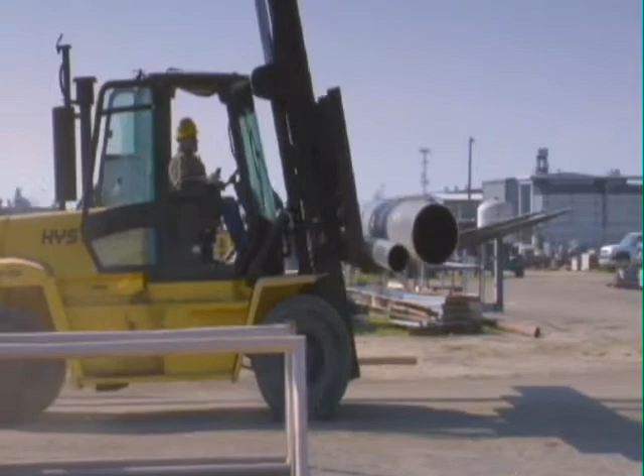This video is an overview of our safety expectations. We'll spend the next 30 minutes reviewing the critical safety issues that affect your work every day.

Let's start with the basics, your safety responsibilities. First, you must follow your company's safe work practices. Second, read the Contractor Safety Handbook provided by the producer. The handbook is your guide to safety expectations while working on our property. Keep it handy so that you can refer to it whenever you have questions.

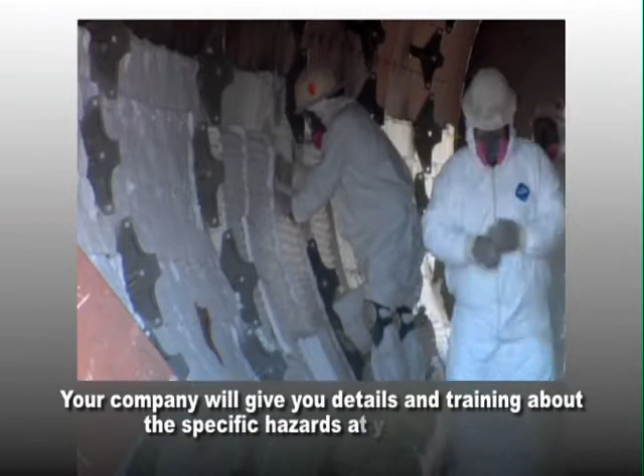We have developed this video to help you identify some of the hazards you might face on the job. Your company will give you details and training about the specific hazards at your job site. Hazard recognition and participating in safety tailgate meetings is important for you and your coworkers' safety.

Finally, some work areas will have additional requirements. Your company may have safety rules that are more strict than those of the oil producers. Check with your supervisor. You should recognize on-site safety rules cannot cover every possible situation. You still need to use your own good judgment.

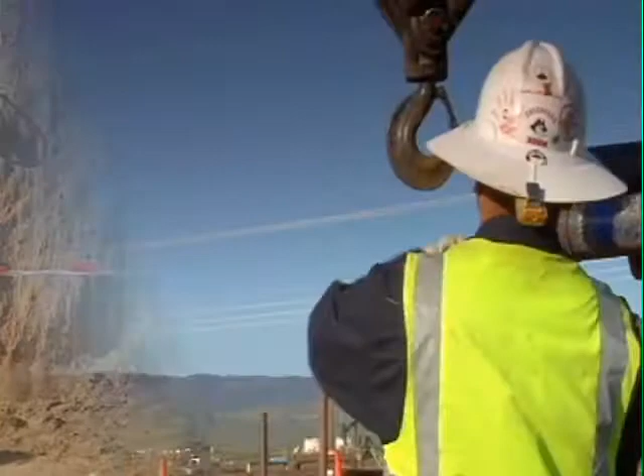As you begin your job, see that you wear proper clothing and the right personal protective equipment for your job. Stop any work that's not being done safely. You have the authority and the duty to stop unsafe work. Then correct the problem or safeguard the condition and report it to your supervisor.

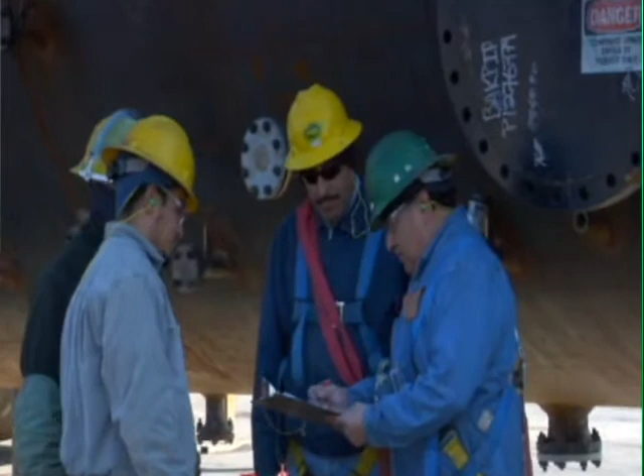All work must be planned. Your supervisor is responsible for planning work, but you must know and follow the plan. This planning includes emergencies and your responsibility to respond quickly in the event an incident or injury occurs.

Your company must provide you and your coworkers with a safety orientation and job-specific training. Your company must also provide the right tools and personal protective equipment in good working order. Supervisors must know and follow all safety policies. They must notify the producer of incidents immediately, investigate all accidents, and then submit a report to the producer.

Personal protective equipment, hydrogen sulfide, H2S, and respiratory protection.

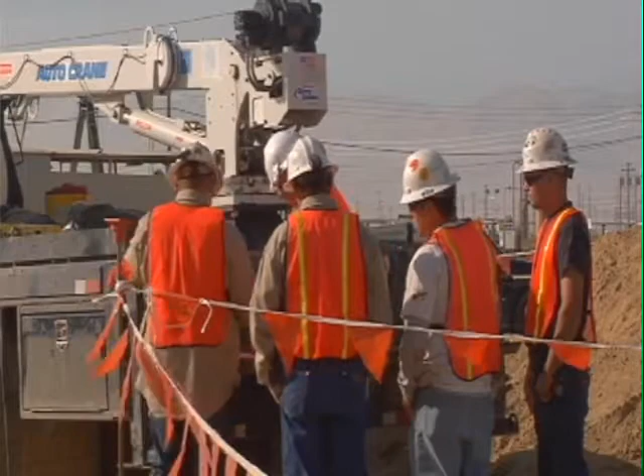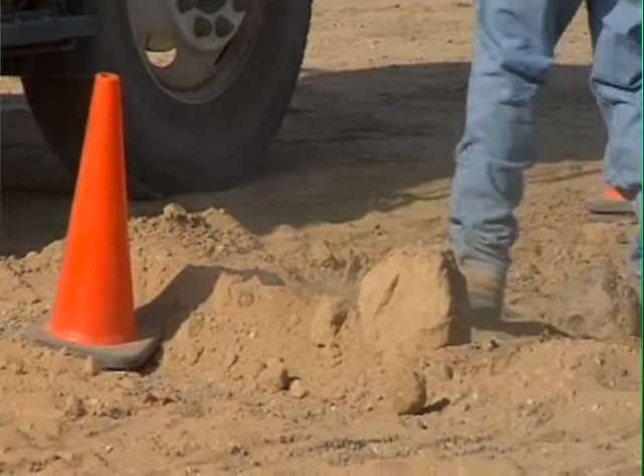Now let's discuss the importance of personal protective equipment. Everyone who works at our locations must use basic personal protective equipment. We require everyone on the job site, including visitors, to wear an approved hard hat. Most producers require hard-toed safety footwear. Many producers require that everyone wear safety glasses with side shields or acceptable wraparound safety glasses.

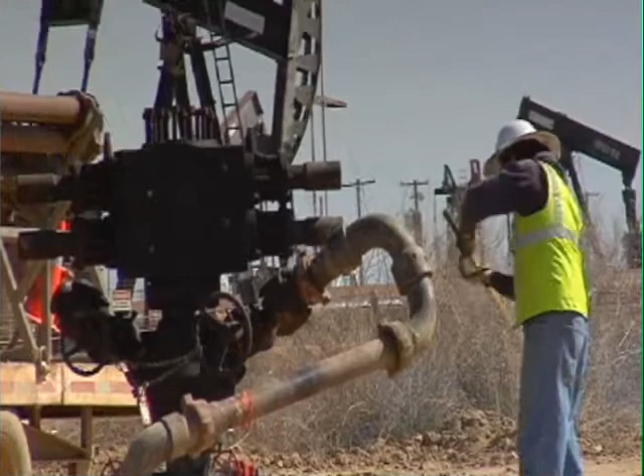Some producers require snake chaps to be worn in certain situations. Gloves must be used when the job requires it. You must wear proper work clothing, including long pants and a shirt with sleeves. Never wear loose or torn clothing or sleeveless shirts. Some producers do not allow hooded shirts or sweatshirts to be worn. Certain jobs may necessitate that fire retardant clothing, FRC, be worn.

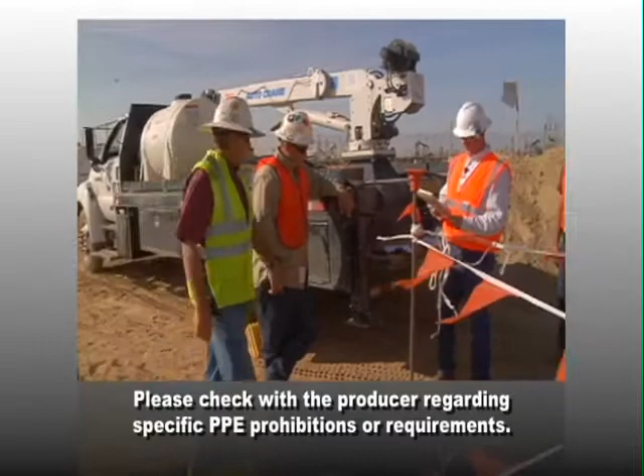If your clothes get soaked with oil or any other substance that could catch fire or irritate your skin, change the clothes as soon as possible. Some producers may have prohibitions regarding wearing rings or other jewelry while working on their properties. Please check with the producer you are working for regarding specific prohibitions or requirements.

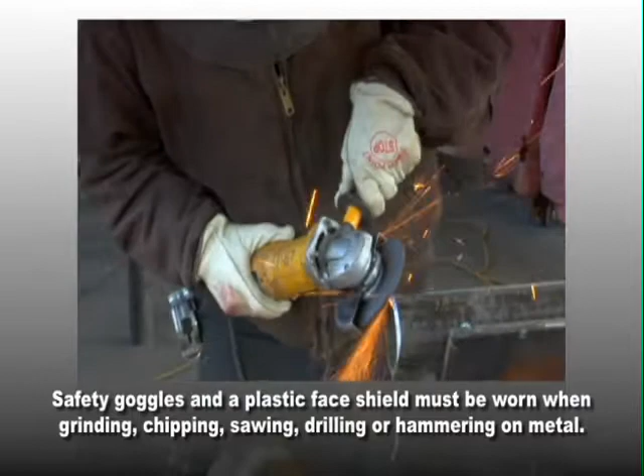Safety goggles and a plastic face shield must be worn when grinding, chipping, sawing, drilling, or hammering on metal. Chemical goggles must be worn anytime a splashing hazard exists. Approved hearing protection must be worn by all personnel working in or near posted areas, or if the job task requires it. Different jobs require specific safety equipment. For example, safety harnesses and lanyards must be worn by employees working at unprotected heights above the ground.

Many locations produce crude oil and gas containing hydrogen sulfide, H2S, or sour gas. Hydrogen sulfide is poisonous and can be lethal in low concentrations. All contract personnel working around production equipment, including well work and drilling operations that handles crude oil containing H2S, must be trained in H2S safety.

Your company is responsible for providing you with appropriate respiratory protection and required training. Many areas require the use of personal H2S monitors. You must be trained by your company in the operation of monitors.

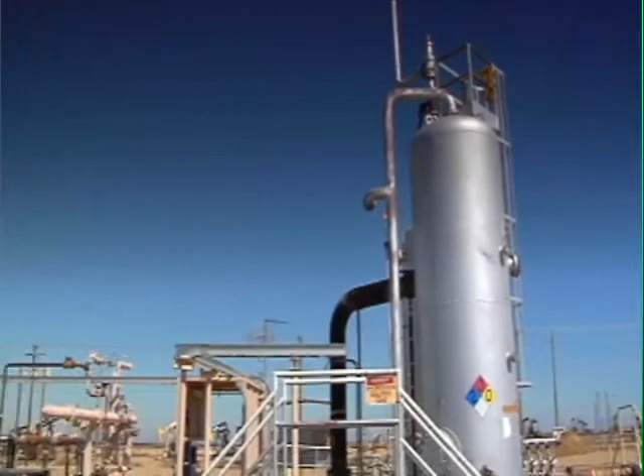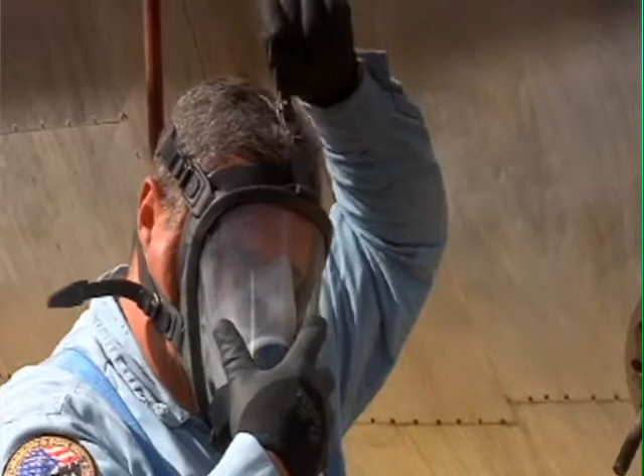If your monitor alarms, move quickly crosswind, uphill, and away from the source. When working in a possible H2S environment, stay upwind of the potential source and plan a route of escape. Wind indicators are provided around equipment handling H2S and at rig locations. Never attempt to rescue an H2S victim unless you have a backup person available and have donned SCBA.

Communication is a critical part of any safety program. Let's look at 3 important elements: the oil producer's safe work practices, the safe work permit, and energy control or lockout, tagout, blockout procedures. Safe work practices are a set of requirements that everyone must follow when working on our properties.

A key section of safe work practices are the basic work rules. Everyone must follow these rules at all times. Let's review these basic rules.

Always act with safety in mind, both your own and your coworkers. Plan each job properly. Identify and address known hazards. Do not start the work unless you can do it safely. Stop or pause any unsafe job or operation.

Do not work unless you are fit for duty. Do not work unless you are properly trained for the job. Do not take part in fighting, scuffling, horseplay, or any other activity that could injure someone.

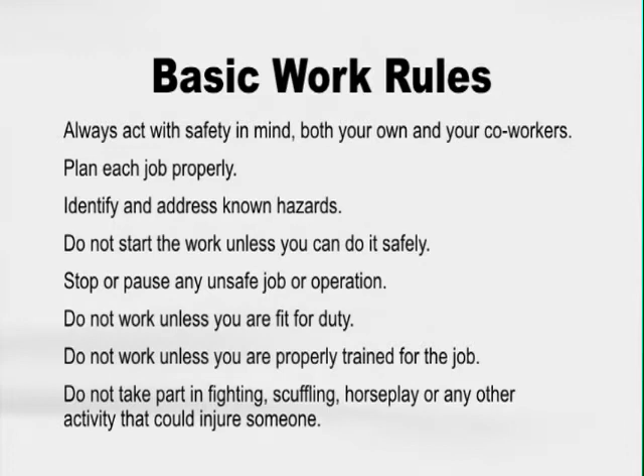Comply with all posted warning signs. Wear required protective equipment. Use and maintain tools and equipment safely. Operate vehicles safely. You must follow the substance abuse policy.

You may not possess, use, or sell illegal drugs, paraphernalia, or legal but improperly used drugs while working at our locations. This rule includes prescribed or over-the-counter drugs that are not used for the intended purpose.

Do not report or return to work when impaired by alcohol. You may not possess or use alcoholic beverages on our properties. You may not carry or use firearms, weapons, fireworks, explosives, live ammunition, or devices that will start fires.

Do not remove, damage, or interfere with any safety device or warning sign. Smoke only in designated areas.

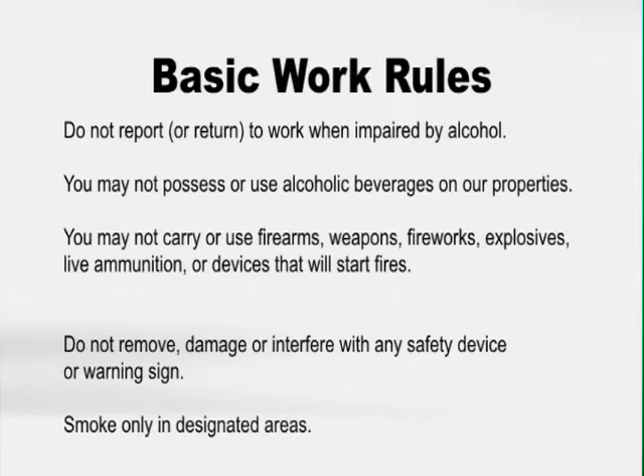Report all safety incidents to your supervisor right away. This includes personal injuries, equipment damage, and spills. Do not steal, damage, destroy, or remove any property belonging to the oil producers or its employees, contractors, or visitors.

Make sure you have a means to call for help when working in isolated areas. Housekeeping rules are an important part of safe work practices.

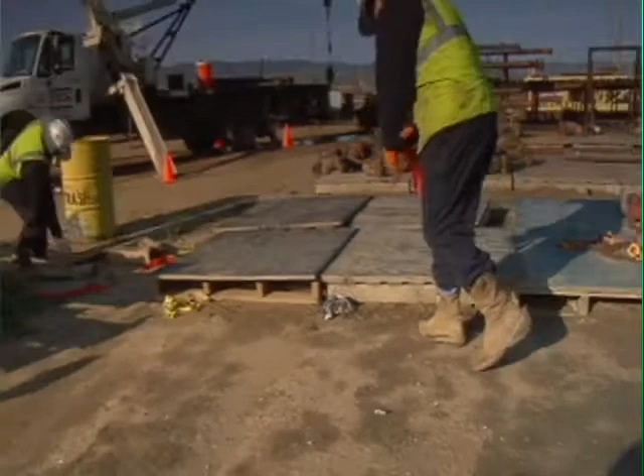Always keep your work area clean and orderly. Make sure emergency exits are clear. Clean up mud, oil, grease, and litter right away. And make sure to collect trash and debris at least once a day.

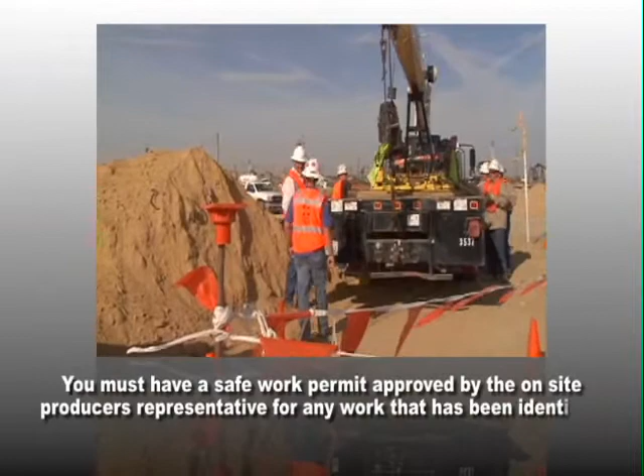You must have a safe work permit approved by the on-site producer's representative for any work that has been identified as non-routine or hazardous. Your supervisor will ask everyone involved to review the permit and then post it at the job site. Make sure you understand all the permit requirements before starting the job.

Stop work if conditions change, a new hazard occurs, or an oil producer representative asks you to stop. Now, let's review some critical hazardous exposures that can be encountered while working on the oil producer's property.

Hazardous stored energy. Energy control is required whenever you are performing tasks which involve equipment, machines, piping, or vessels which could potentially injure you due to a release of stored energy. Energy sources must be identified and isolated to a zero-energy state before service and maintenance can be performed.

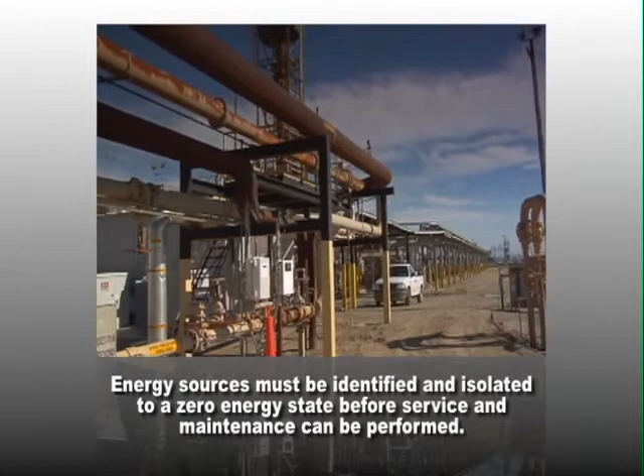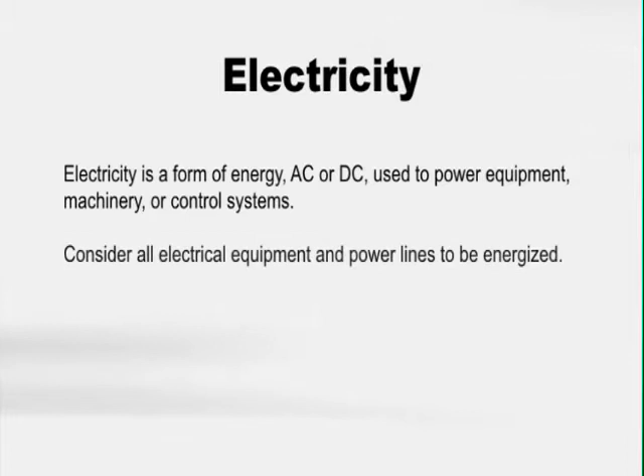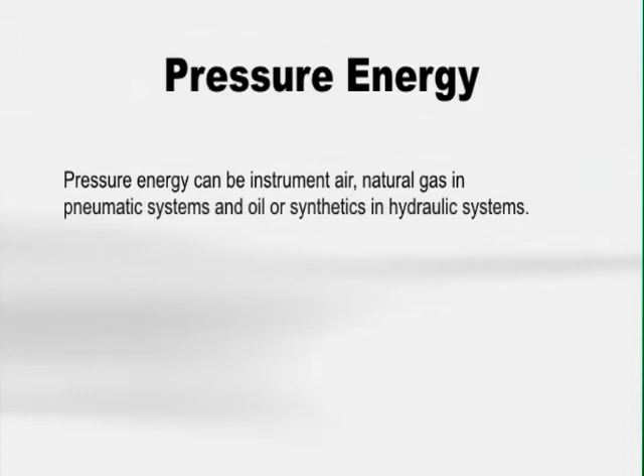Electricity is a form of energy, AC or DC, used to power equipment, machinery, or control systems. Consider all electrical equipment and power lines to be energized. Pressure energy can be instrument air, natural gas in pneumatic systems, and oil or synthetics in hydraulic systems.

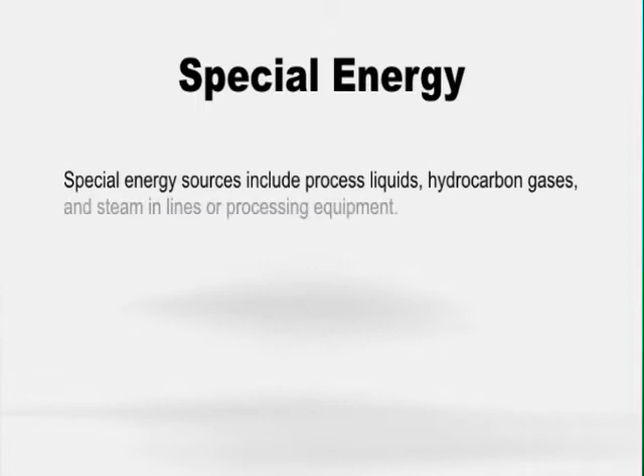Momentum gravity energy is the force in moving equipment components caused by gravity or inertia. It is critical to identify momentum energy after the power source has been shut off. Residual energy can occur after the power source has been shut off or disconnected. Special energy sources include process liquids, hydrocarbon gases, and steam in lines or processing equipment.

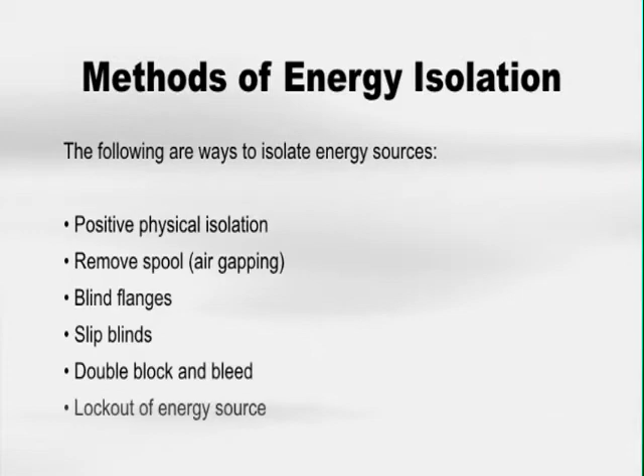Methods of energy isolation. The following are ways to isolate energy sources: positive physical isolation, remove spool, air gapping, blind flanges, slip blinds, double block and bleed, and lockout of energy source.

Locks must be used with tags to isolate energy sources. Tags should indicate the person responsible for the lockout, the reason for the lockout, the job being performed, and the date. Each producer has developed equipment lockout, tagout, blockout procedures.

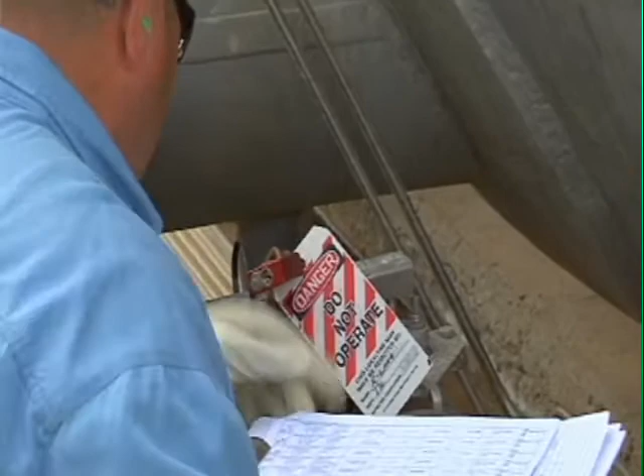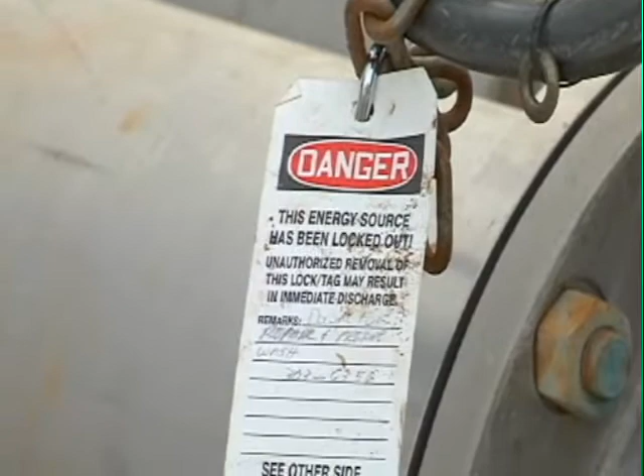Contractors must understand these requirements and assess how their own procedures will work in conjunction with the producers. Never shut down or start up equipment or open or close valves until you notify the producer's representative or have been directed to do so by the producer's representative.

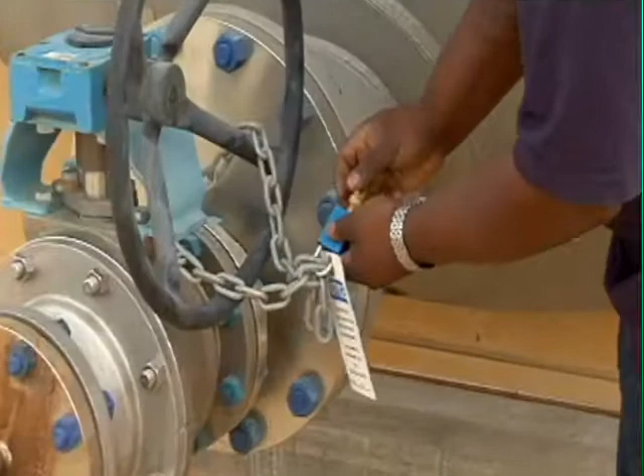Group locks can be used to isolate equipment for a group of workers. Group lockout must provide the same level of protection as utilizing individual locks. No one may attempt to start up equipment, machines, or processes that are locked and tagged out of service. Specific procedures must be followed to restart, re-energize, or activate equipment or systems that have been isolated.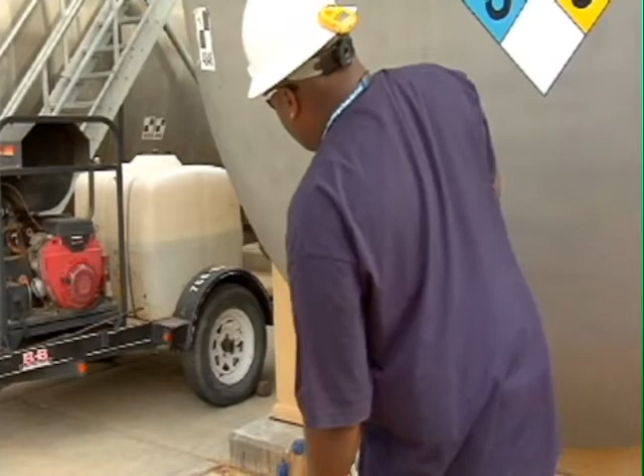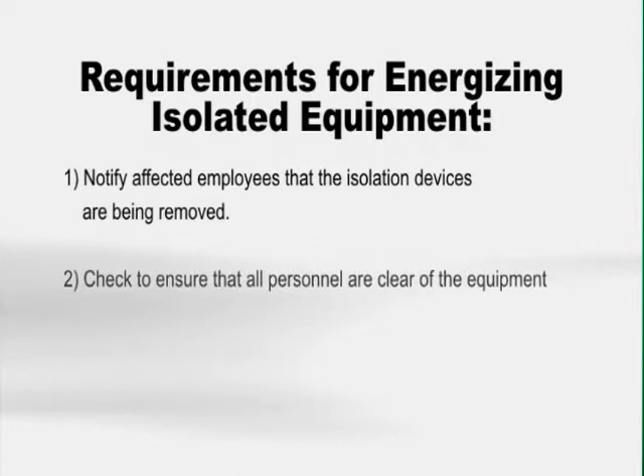The basic requirements which must be followed before isolation devices can be removed and equipment can be energized are: first, notify affected employees that the isolation devices are being removed. Second, check to ensure that all personnel are clear of the equipment or system to be re-energized. And third, locks used to isolate equipment can only be removed by the person who originally applied the lock.

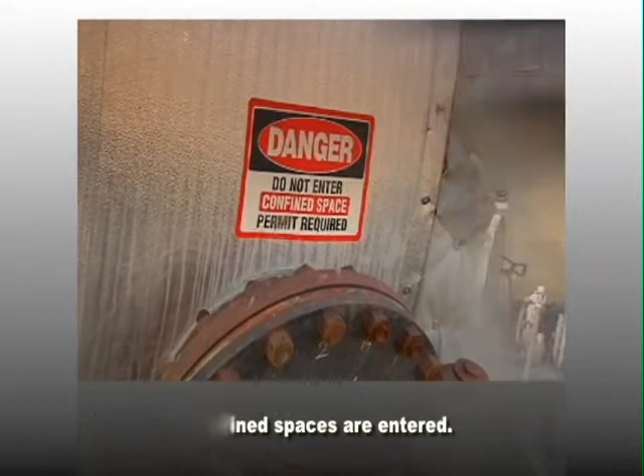Confined spaces. Confined space entry permits are required any time confined spaces are entered. Never enter a confined space unless you have received the appropriate training, have the right equipment, and have been tasked with work in that area.

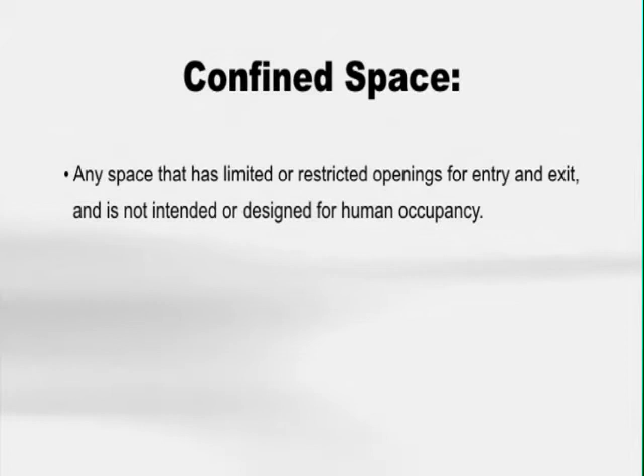A confined space is any space that has limited or restricted openings for entry and exit and is not intended or designed for human occupancy, has the potential to contain flammable, toxic, or oxygen-enriched or deficient atmospheres, or contains any other recognized serious safety or health hazard.

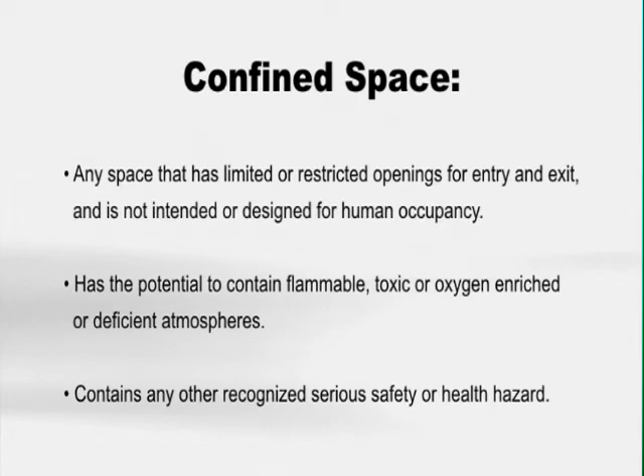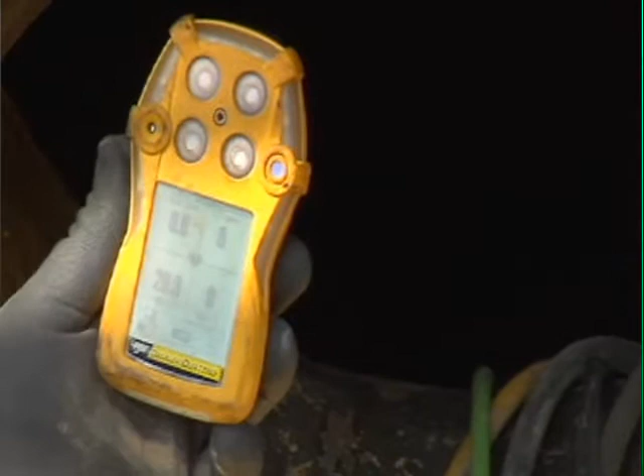A trained attendant or standby person must be assigned to a confined space entry at all times. Forced air ventilation equipment, appropriate lighting, rescue equipment, and continuous atmospheric monitoring may also be required depending on the nature of the hazard. Safe equipment operation is another important part of injury prevention.

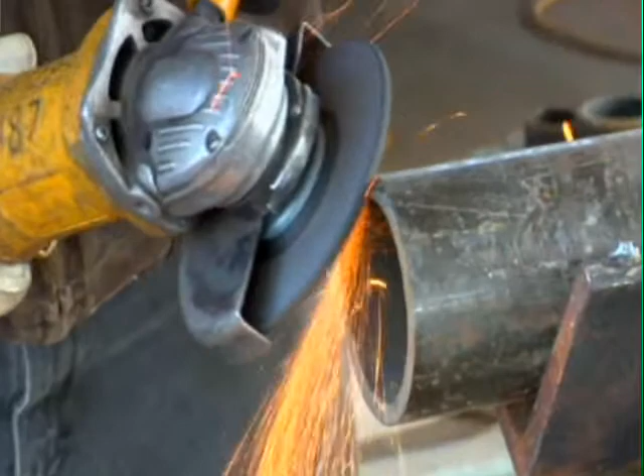Only designated and qualified people may operate power tools, equipment, or shut down equipment.

Safe vehicle driving. You must have a valid driver's license to drive on our property. Practice defensive driving. Obey posted speed limits. Drive only on the prepared roads. Wear seat belts at all times.

Use pull-through parking whenever possible to avoid unnecessary backing. If you must back up heavy equipment, have a spotter signal you. Some equipment requires backup alarms.

Some producers require that you never leave your vehicle unattended while it's running. At these locations, stop the motor, set the parking brake, and put the transmission in low gear. Chock your wheels if you think there's a possibility the vehicle might roll.

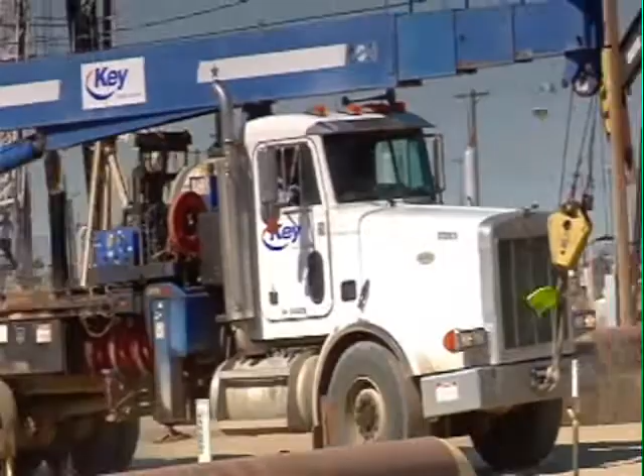Some oil producers may have special driving procedures or rules in their areas, such as specific speed limits and prohibitions regarding cell phone use while driving. Be sure to check with your supervisor at your work location for any special requirements.

Ergonomics. Always use safe lifting techniques. Improper lifting is the most common cause of back injuries. Face the load you're about to lift.

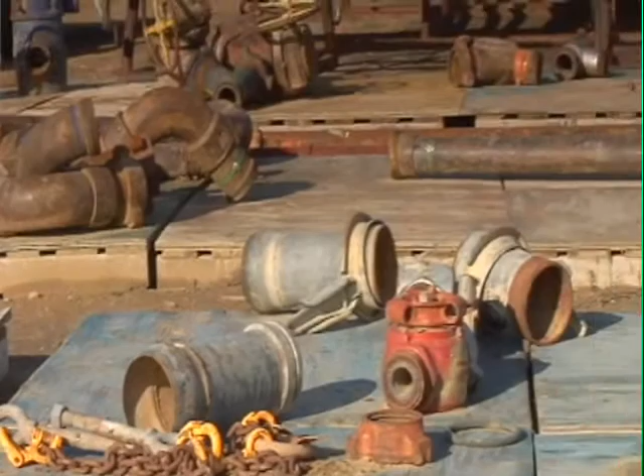Bend your knees and hold the object close to your body. Keep your back straight. Use your legs, not your back, to lift the load. You should never try to lift more than 50 pounds by yourself.

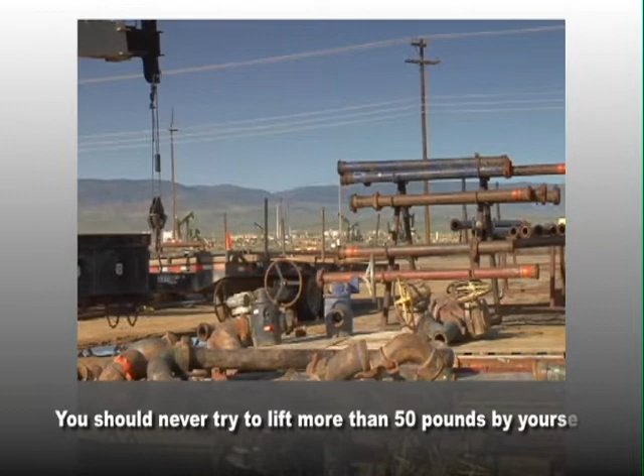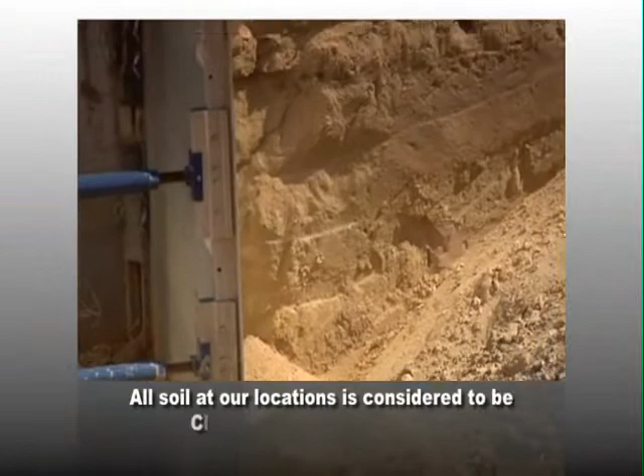Excavation and trenching. Unless otherwise determined by a competent person, all soil at our locations is considered to be Class C sandy or loose soil. A competent person is required to be on site.

For our operations, the Cal OSHA regulation for excavation or trenches deeper than 5 feet shall be followed when personnel are required to enter. Proper protective measures shall be taken, such as sloping, shielding, or shoring. Barricades are always to be installed for any open excavation or trench.

Cranes and rigging. All cranes must be operated by qualified operators. A qualified signal person must also be on duty. All power lines should be considered energized unless proper measures have been taken for de-energizing.

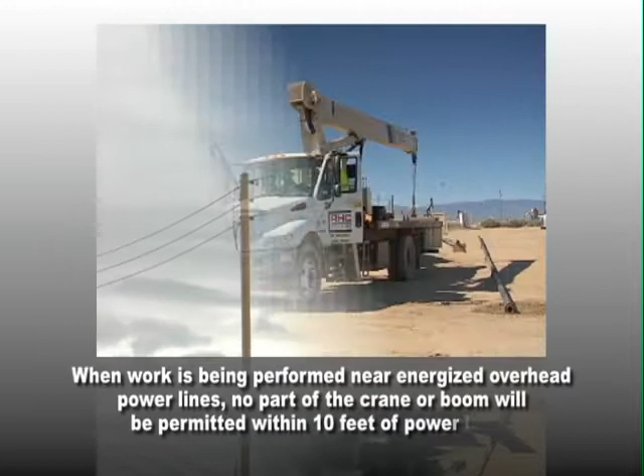When work is being performed near energized overhead power lines, no part of the crane or boom will be permitted within 10 feet of power lines. Consult with your producer representative for specific power line clearance requirements in your location.

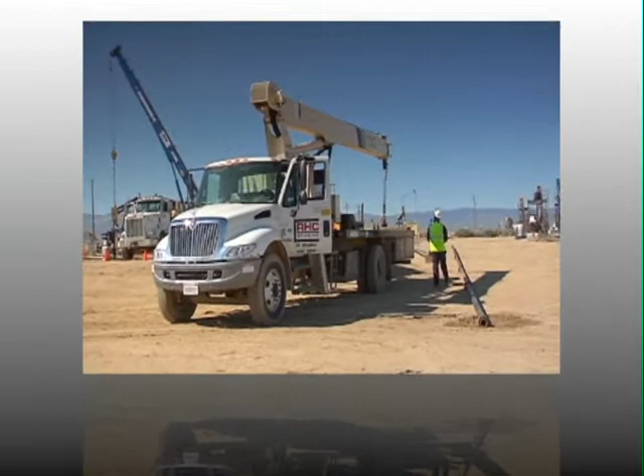Most California oil producers recommend the use of the Look Up and Live flag procedure for crane operations at their sites. This procedure is designed to keep the crane operator from overlooking or forgetting major steps in the operation of his or her crane. The crane operator shall remove the flag from the load line or lifting hook and look up for power lines while walking around the crane.

The operator then attaches the flag to the top of the steering wheel of the vehicle. If power lines are on location, they must be identified by placing cones 10 feet out below the lines.

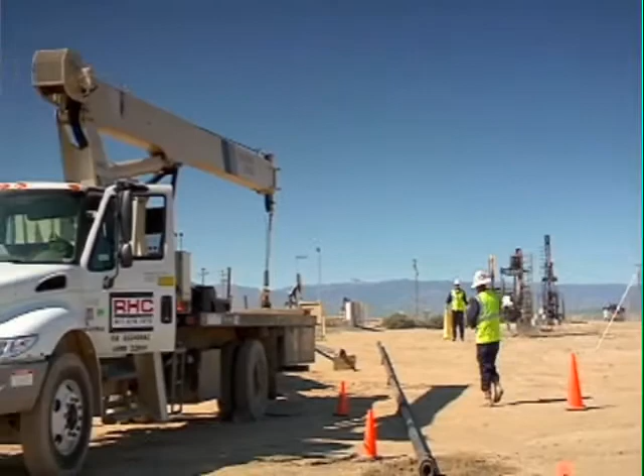When crane operations are complete, and before any driving begins, the crane operator shall remove the flag from the steering wheel and clip it to the load line.

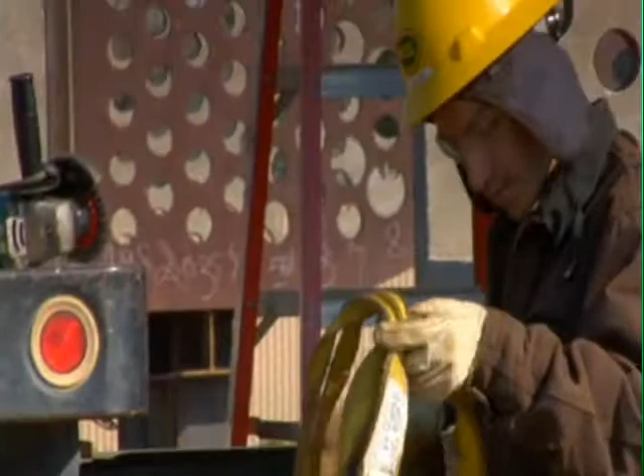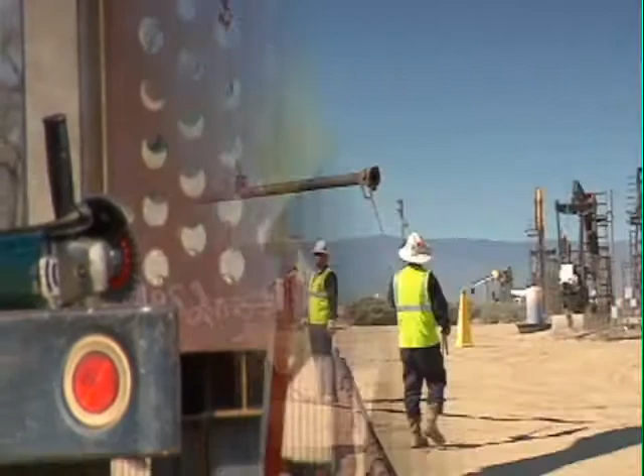Rigging methods depend largely upon the job to be done. It is important to check all phases of the job and all possibilities of job deviation which may affect the rigging components. Loads should be controlled by use of a tag line or snub line. Never walk or work under a suspended load.

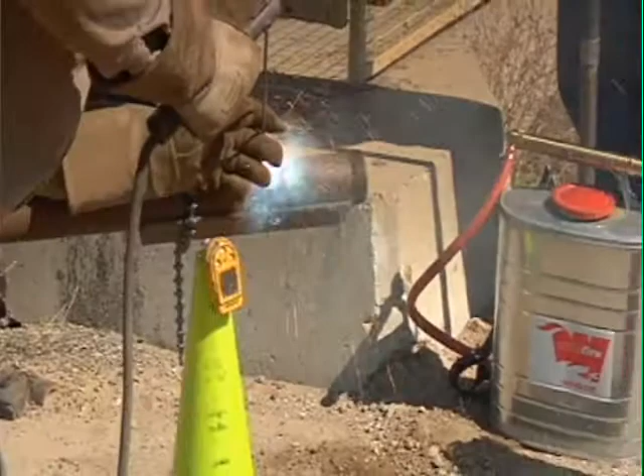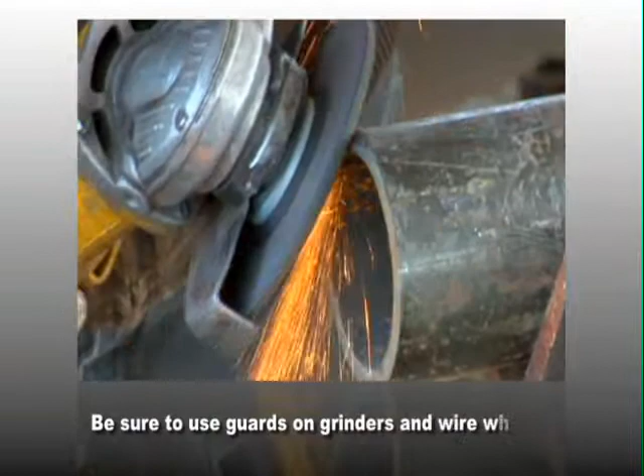Safe welding. Welding operations include a high risk of fires and injuries. Be on the lookout for conditions that could lead to a fire and take fire prevention measures. Always keep a fire extinguisher on hand. Be sure to use guards on grinders and wire wheels.

Fire prevention. Fire prevention is a serious concern in every job. Never smoke or use open lights around crude or petroleum tanks. Before welding, cutting, or grinding in a grassy area, remove any material that might burn.

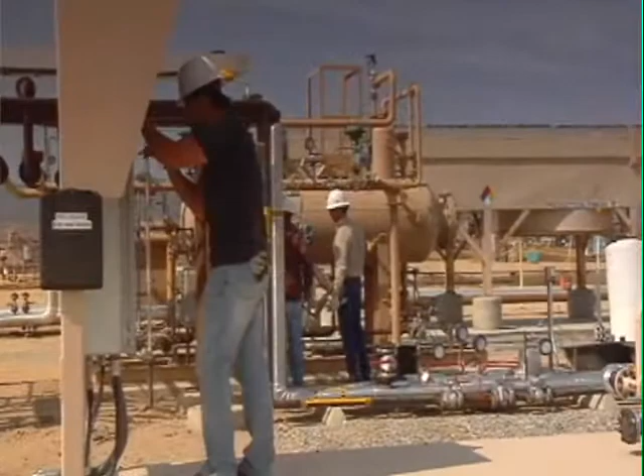Every location has its own emergency action plan. You must know your location's plan and be able to take quick action if an emergency occurs. When an emergency occurs, immediately shut down work in a safe manner and report to the designated evacuation area.

General environmental rules. Air emissions. California oil producers are committed to protecting the environment. We ask that you make every effort to help us meet this goal. We are required to maintain leak-free facilities to comply with our air permits. We ask your help to ensure that all fittings are made up tight and that all sources of gas leaks are plugged off.

Spill reporting. You are required to immediately report any spill or release of materials, including crude oil and/or condensate, to a producer representative.

Stream channel protection. Disturbance to navigable waterways, stream channels, or any other watercourse with habitat that may support endangered species in its bed or banks must be approved by the producer. Disturbance to stream channels requires permitting prior to commencing any work on the stream bed or bank.

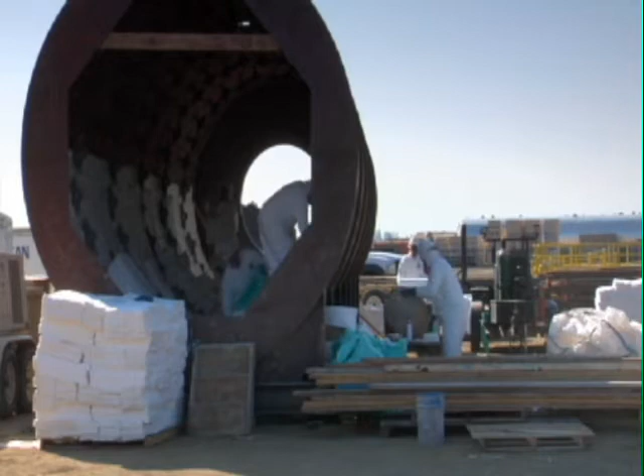Waste disposal. Any job is not complete until all waste and trash are removed from the job site and disposed of properly. The contractor is responsible for the disposal of all trash and waste generated by their activities. The disposal method must be approved by the producer. If you have any questions about hazardous waste, please contact your supervisor or oil producer representative.

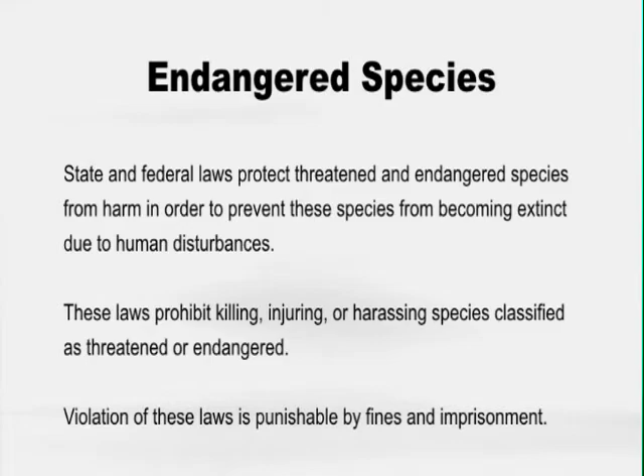Endangered species. State and federal laws protect threatened and endangered species from harm in order to prevent these species from becoming extinct due to human disturbances. These laws prohibit killing, injuring, or harassing species classified as threatened or endangered. Violation of these laws is punishable by fines and imprisonment. Endangered species are known to exist in most California oil fields. Contact an oil producer representative at your work location for a list of endangered species present at that location.

Now let's take a look at work areas where you may face certain specific hazards. Keep in mind that this video is a general overview of some of the common hazards. Your company will give you details and training about specific hazards at your job site. Your Contractor Safety Handbook includes a more complete list of hazards you may face while working at our locations. In the following segment, we will review possible hazards in major areas, including site-specific general hazards, hazards associated with wells, and hazards at and around our facilities and equipment.

Let's start with general hazards. Our fields contain a vast network of above-ground and underground lines and pipes which carry a variety of potentially hazardous fluids. You must always be aware of these lines and watch out for them while working. For example, be careful not to drive over an exposed pipeline.

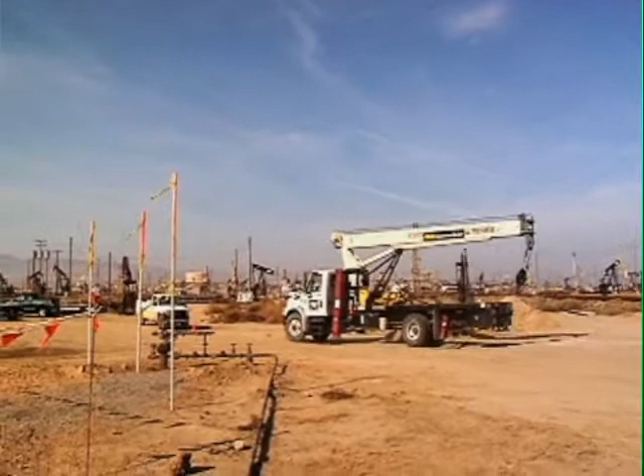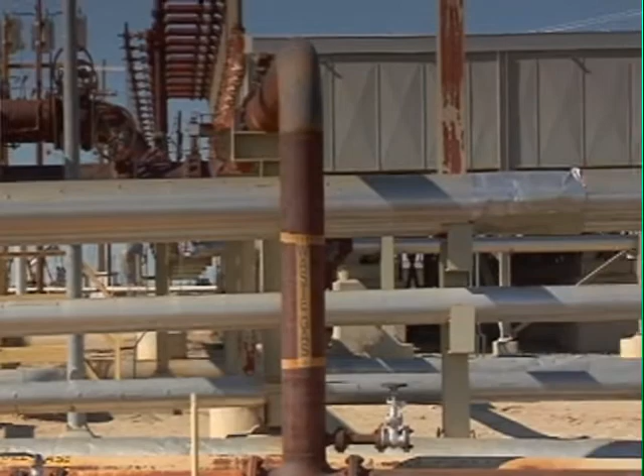Above-ground lines include hydrocarbon pipelines, steam lines, fresh and produced water lines. And remember, these lines may be very hot. You could get a severe burn by touching a line. Many hydrocarbon lines contain products that may include hydrogen sulfide, commonly called H2S. As we mentioned earlier, H2S is a poisonous gas that's heavier than air.

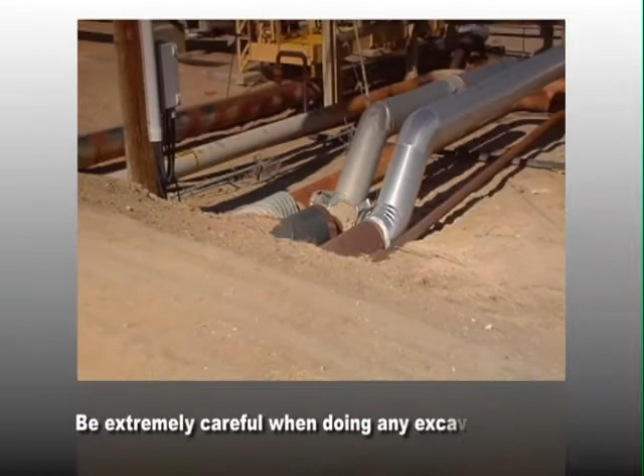Underground lines, although we cannot see them, may be more hazardous than above-ground lines. Be extremely careful when doing any excavation work. We can provide maps that show the type and location of underground lines. Always talk to your supervisor and the producer representative before digging.

Most oil fields have subsurface valve boxes. Valve boxes are low spots where H2S and other harmful vapors may accumulate, and a valve box is a confined space.

Chemicals are another general hazard you may encounter anywhere in the oil field. Many of them can be harmful. Always read the material safety data sheet before working with any chemical. Follow the precautions carefully and wear the appropriate personal protective equipment.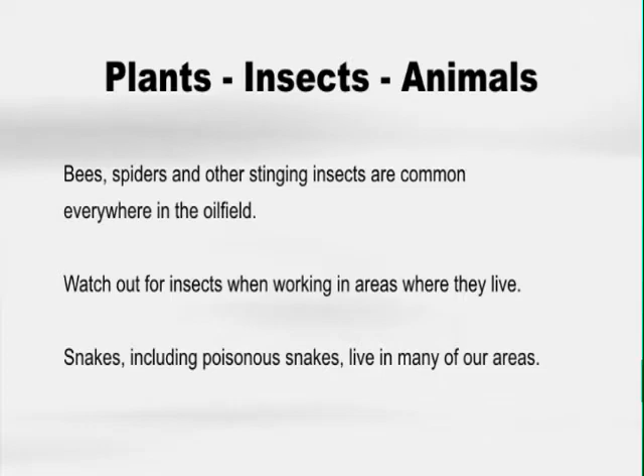Bees, spiders, and other stinging insects are common everywhere in the oil field. Watch out for insects when working in areas where they live. Snakes, including poisonous snakes, live in many of our areas. Watch where you walk and look around before reaching, especially in areas where snakes may hide.

The second group of common hazards is associated with wells. Our oil fields contain several types of wells, ranging from producing wells to injection wells. Each type has its own hazards. The most common wells are heavy oil producers used in thermally enhanced production.

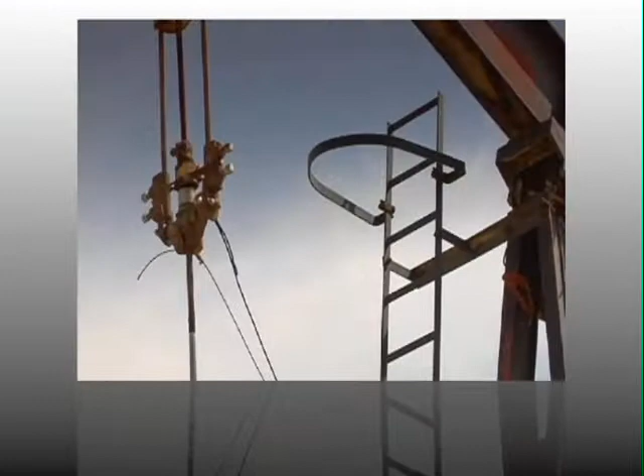Fluids from these wells may be very hot and may contain H2S and other flammable gases. Other wells produce lighter crude. These wells present a special fire hazard because the oil they produce has a lower flash point than heavy oils.

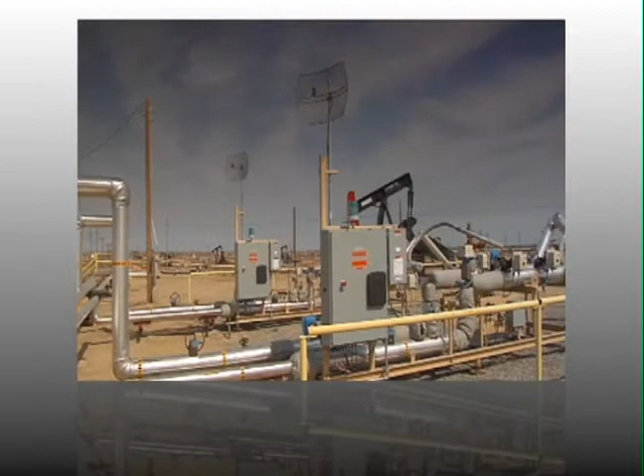Steam injection wells pose high temperature and pressure hazards. They also contain large volumes of hot steam and possibly H2S. Also, be aware of high pressure and possible high temperature hazards when working around water flood injectors.

Drilling sumps or reserve pits at drilling or workover locations have flags or fencing marking the boundaries. Be very careful when driving near active drilling or workover operations.

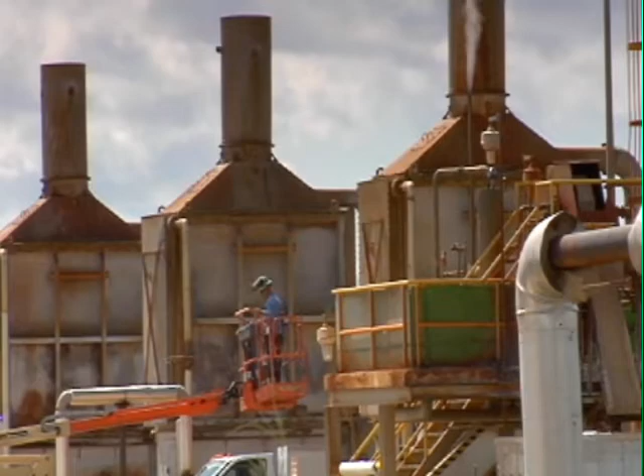Our third group of hazards occurs in and around facilities. Steam generators are essential to produce California's heavy crude, but these generators involve a number of potential hazards. Never go into a generator site unless your job specifically requires it. The most obvious hazards are the very high temperatures and pressures needed to generate steam.

High noise levels are another possible hazard. Always wear hearing protection when working around steam generators. Steam generator sites may contain hazardous chemicals, such as the caustic used in the scrubbers.

Casing vapor recovery units, or CVRs, collect the casing gases from nearby wells. CVRs are a possible source of H2S and other flammable gases.

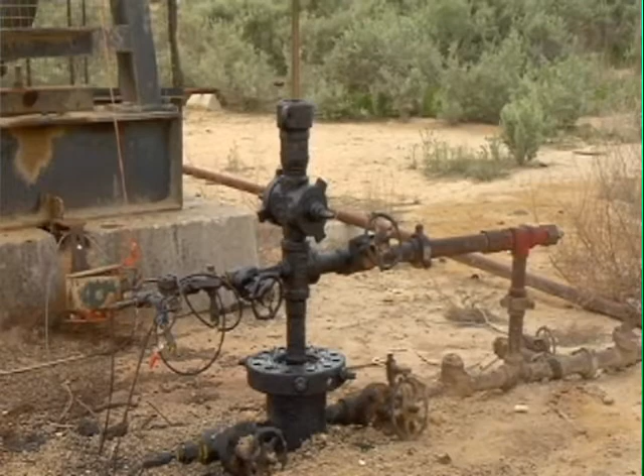Test stations are accumulation points for the flow lines from producing wells. Never operate any valve at these sites without prior specific instructions. Closing a flow line inlet valve while a pumping unit is operating can cause packing failure or line rupture.

Gas plants and cogeneration plants, like other major facilities, are often fenced. These plants are limited access areas. All workers must check in, and only those with required jobs and proper training will be allowed inside.

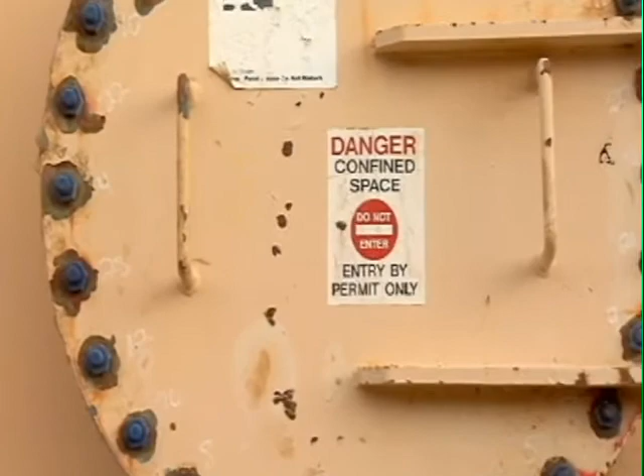Tanks are another potential hazard in our operations. Empty tanks pose a risk of fire or explosion, since they often contain oil and flammable vapors. An empty tank is a confined space when going inside. Never walk on top of a tank without obtaining the producer's approval and taking necessary precautions.

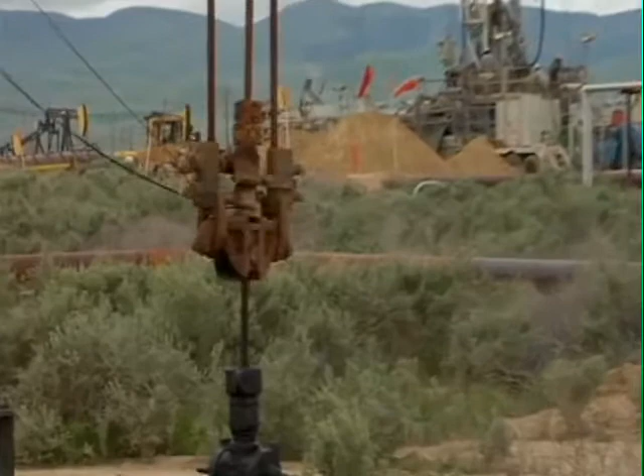Radiation is a possible hazard in some areas. We sometimes use radioactive materials for drilling, well servicing, and X-raying pipe. Be alert for radiation warning signs and don't go inside a posted area.

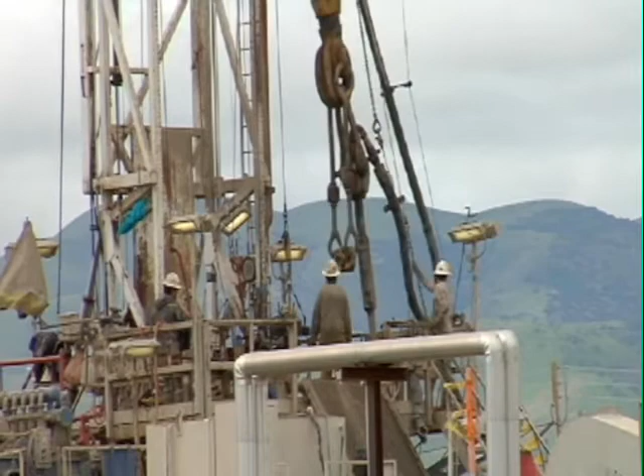Drilling, construction, blasting, well servicing, and well workover operations all present different hazards. Never go into a specialized work area unless your job requires you to be there. For those of you who may work in the offshore environment, you will receive a thorough orientation about the hazards you can encounter there, prior to and upon arrival at the offshore platform.

Now that you've seen the areas where you may encounter hazards, you're ready to learn more about these potential hazards and how to protect yourself. Your company will provide this specific training.

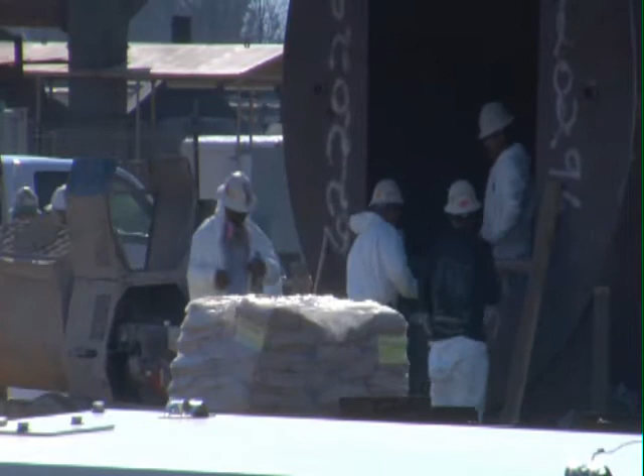Stay alert for possible hazards and use the appropriate personal protective equipment. Be sure to ask questions if you don't understand the hazards of a job. If you're not sure how to do a job safely, don't do it. See your supervisor for more instructions.

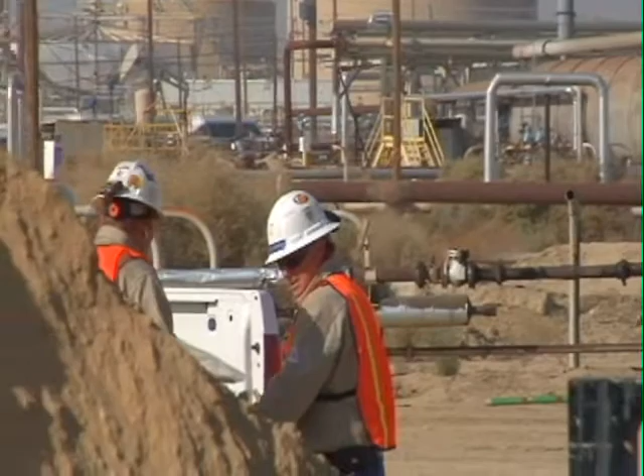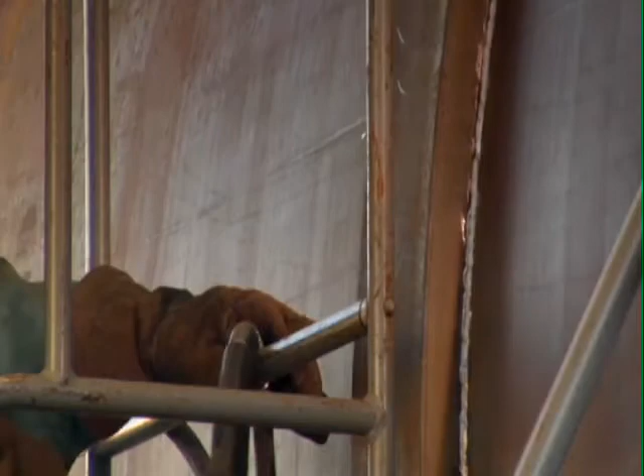Remember, the California oil producers and your company have a strong commitment to safety. We both have the responsibility to provide a safe workplace and to inform you about possible hazards. You, in turn, have the responsibility to know and follow our safety procedures, to stop any work that's unsafe, and to practice safety every day in every job you do.